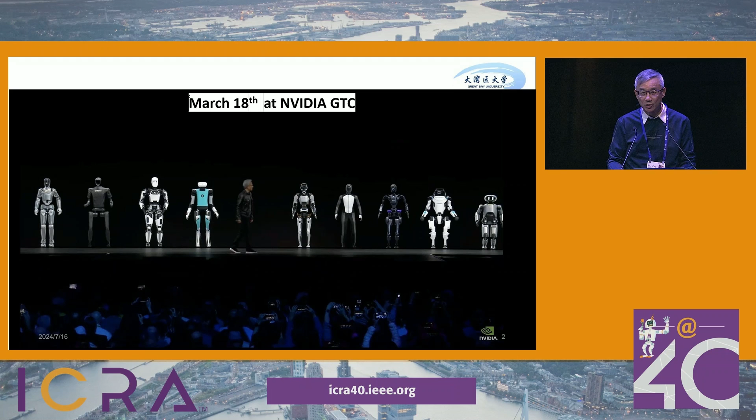Over the year, especially in 2024, we have seen the frenzy wave of humanoids. In mid-March, Jensen Huang showed up on the stage with about 10 humanoids. And just last month, August, in Beijing, there was a World Robot Conference, and there were 27 humanoids, and they were around there for 4 days, walking around and showing off.

There is a big venture market in China as well, and in a rough estimate, there are already more than 60 companies in humanoids, either as startups or spin-outs from some of the very large corporations in China. Almost every week, you will hear of another new humanoid company coming out and raising millions of renminbi. And shamelessly, including one of my companies, joining the frenzy as well.

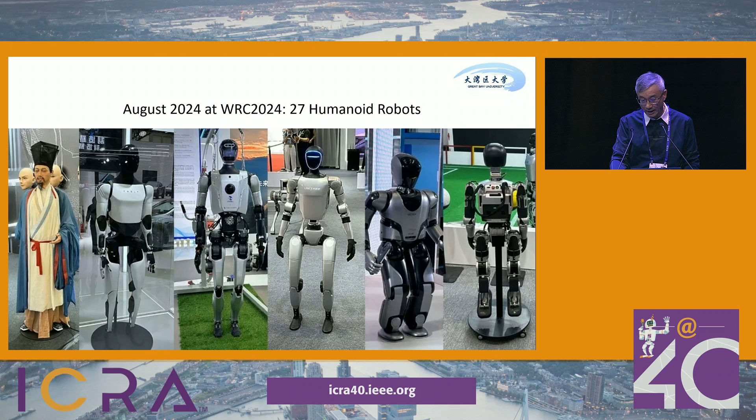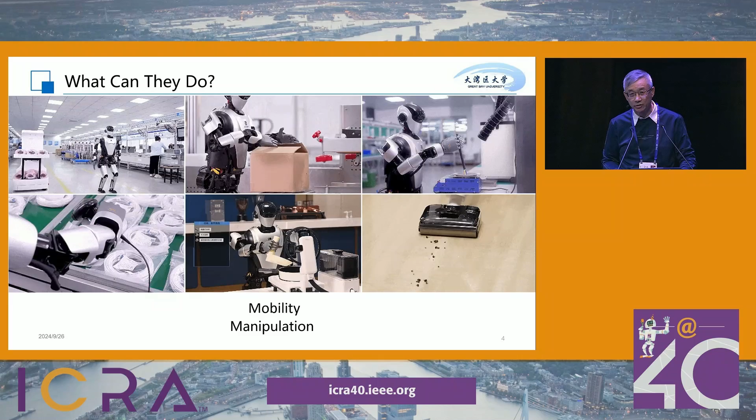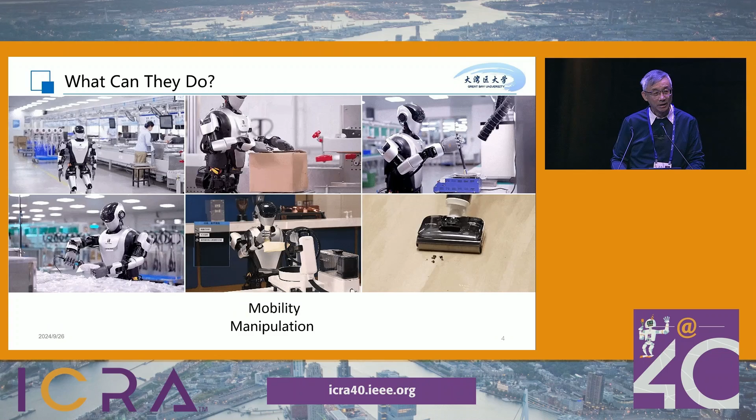But I have to think very seriously about what we are going to do, what we are doing, if there is any hope to make this useful and perhaps economically beneficial. Currently these robots are able to do something, but not a lot. This is from one of those companies. It's not my company. I would not name the company because I'm not sure it's going to be a compliment or not. They are able to walk around a little bit, and they also showed off some very simple skills, picking up some items and putting them into a box. But none of these are in real scenarios or in any real environment.

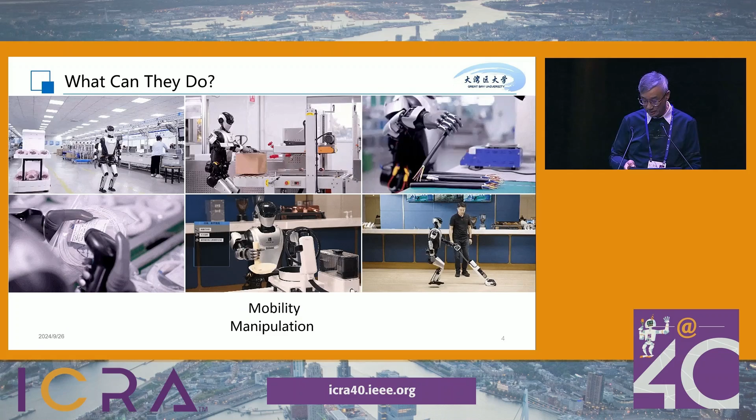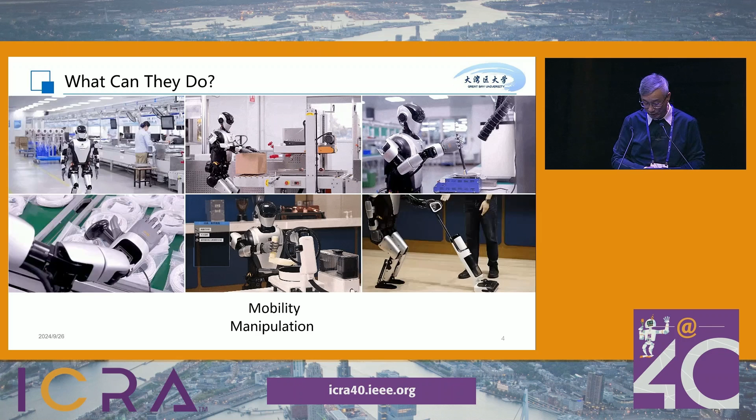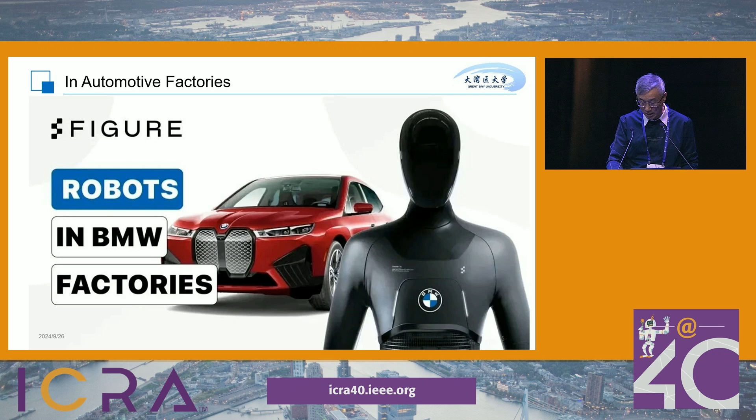By and large, people are talking about 3 major potential markets where humanoids might be deployed, one of which is automotive. I'm sure you have heard of that. And I think Figure has a display here as well during this conference. But what I'm very much interested in is the electronics assembly industry. In China, we call it 3C or ICT, that is information and communication technology products. These products have their uniqueness and their challenges in assembly.

By and large, in the front end, from the computer chips or wafers all the way to printed circuit boards, they are almost fully automated. But at the back end, you will find factories where a group of young workers line up, sitting around tables, and use their hands primarily with some tools to do final assemblies, inserting some periphery components, occasionally doing soldering, fastening screws, and also inspection, and in the end, they pack them up into boxes.

Automation has been implemented in most of these factories, to the extent where it would no longer be cost-effective to push them with total fixed automation. That's because the products have a number of unique features. By and large, they have a lot of varieties, and most of them come in small batches. The factories are not very huge. They're small and medium companies, and they don't need a lot of heavy equipment. In the end, they have to deliver these assemblies in a very cost-effective and time-efficient manner.

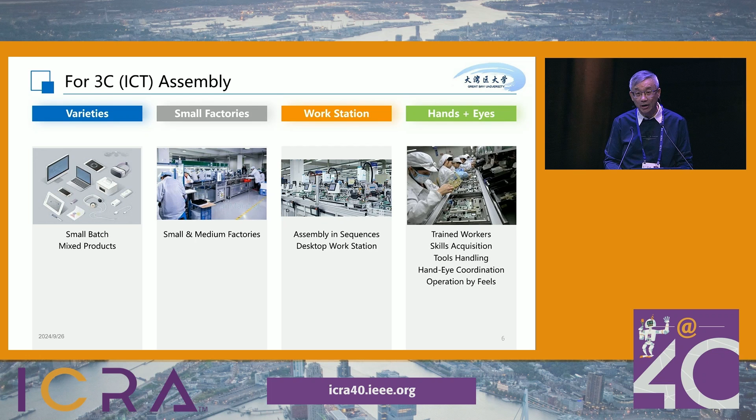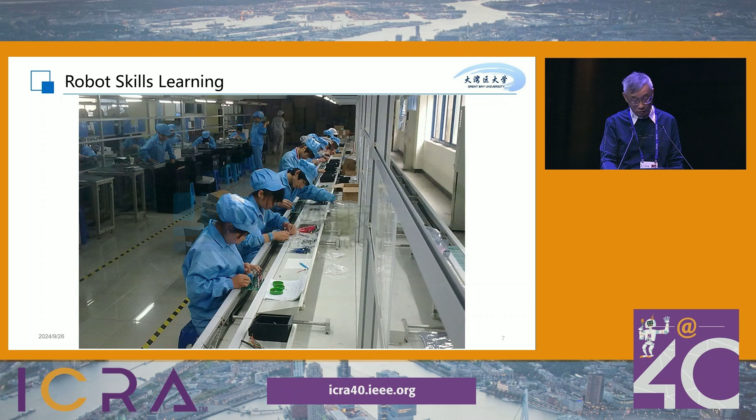So young workers, especially young ladies with sharp eyes and very delicate hands, tend to be employed in these places, where they've been trained maybe for 3 or 4 days for each task, largely using their skills of dexterous manipulation and hand-eye coordination. If you look very carefully at some of these processes, you would think that humanoids might find their place working in places like this, 24 hours a day. They might be more flexible, agile, and cost-effective.

So how do we learn manipulation skills from the workers? And if we do not learn from the workers, are there any other technologies, especially using AI and machine learning, to help us get these dexterous manipulations learned for robots?

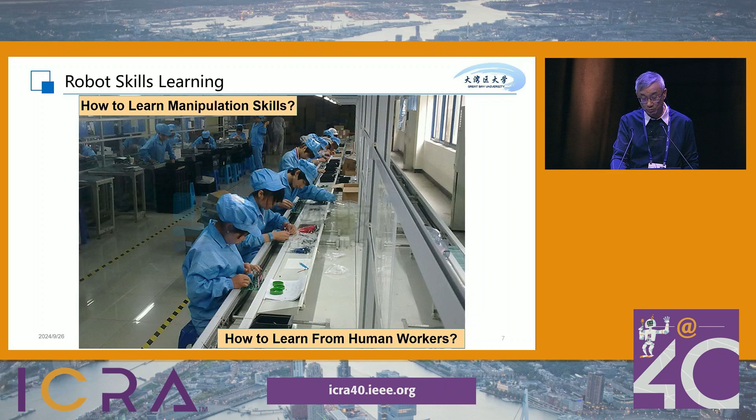And most of these robots need not be humanoids. And you see that the workstations are the primary workplace for the workers or the robots, and mobility is largely not required. But mostly we need two arms and two dexterous hands to be able to do all of this.

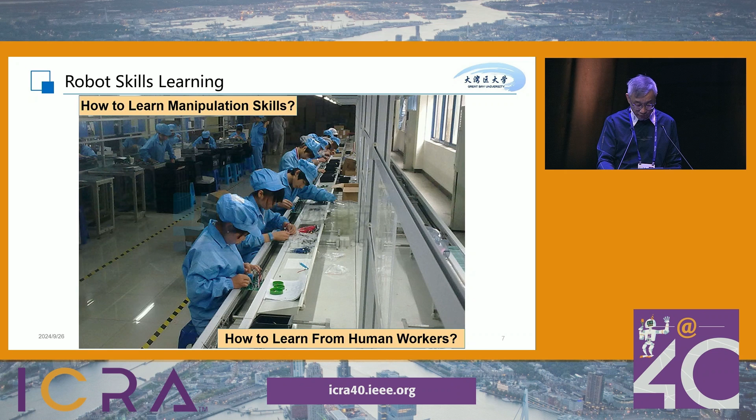For me, as a student under Matt Mason some years ago, I was very fascinated by dexterous manipulation, but really haven't gotten a chance to do much. Now today, we understand from neuroscience, from physiology, what we are capable of doing with our hands, especially when we do the fine touch of assembly by feel, by hand-eye coordination. But we have not been able to get the robots to mimic or to acquire the skills, especially the skills that very delicate young workers are able to do.

So what are the technology components that are missing? One of which is what we are now focusing on, that is trying to figure out how to learn from humans. We know that reinforcement learning is a very powerful tool. Imitation learning has some achievements, but for human dexterous operations in the factory, you are not able to really observe the last fine process of getting things done. That is imparting forces and energy to get the components in the right place with efficiency.

Most of the workers do this very quickly, and it's not strenuous, but in the end, it's very tedious. So they will not like to work for 8 or 10 hours a day. But what would be the tools for us to get robots to learn this? Of course, we are trying sim-to-real, imitation learning, and learning from demonstrations, all these techniques in the laboratories. But to me, we really lack knowledge of human data, especially the touch and feel and tactile sensations that we use quite extensively in our skills.

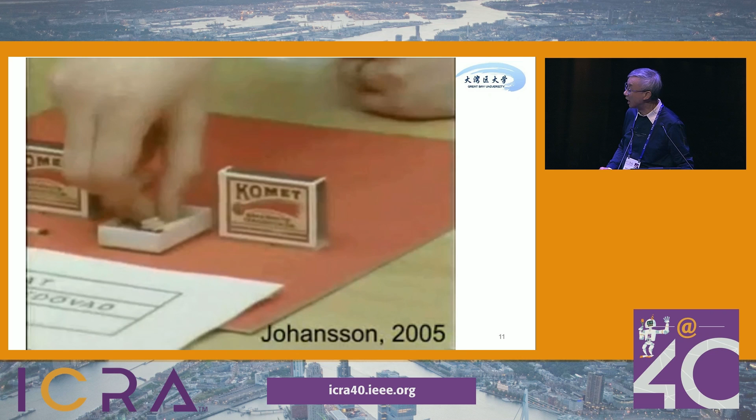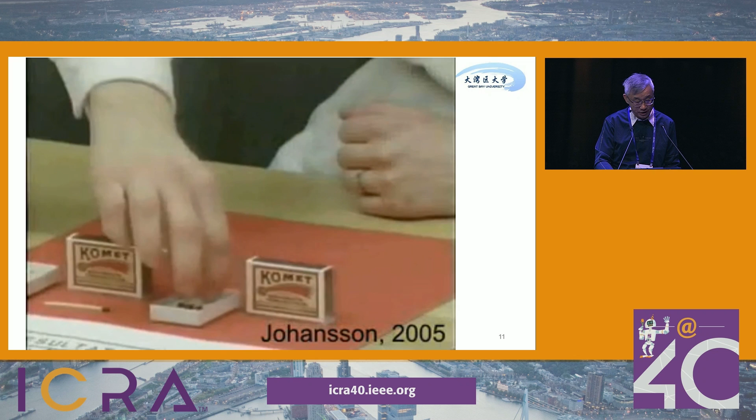And there are databases, or platforms for collecting data, for training robots to do dexterous manipulation, but the tasks that they are able to do, or the data available for the tasks, are very much limited. Grasping is one big category, insertion is another, but fine dexterous manipulation is not much there. So I will just say that one of the technologies that is lacking is tactile sensing. Although we know there is a lot of research on soft skin and tactile sensing, for any dexterous manipulation without tactile capability, you will find it very difficult. This would be the case for a young girl who lost the skin sensation for touch.

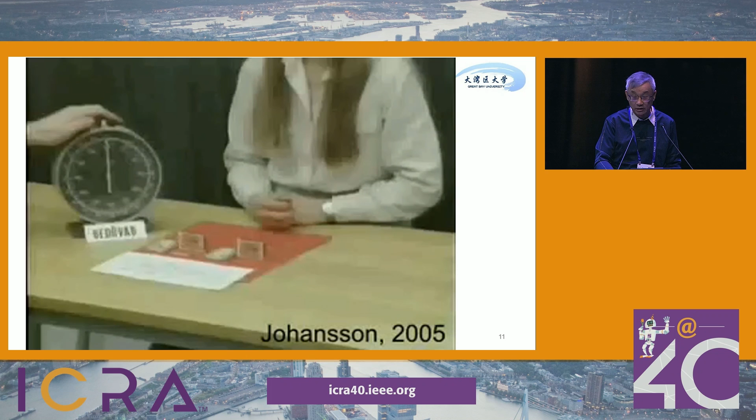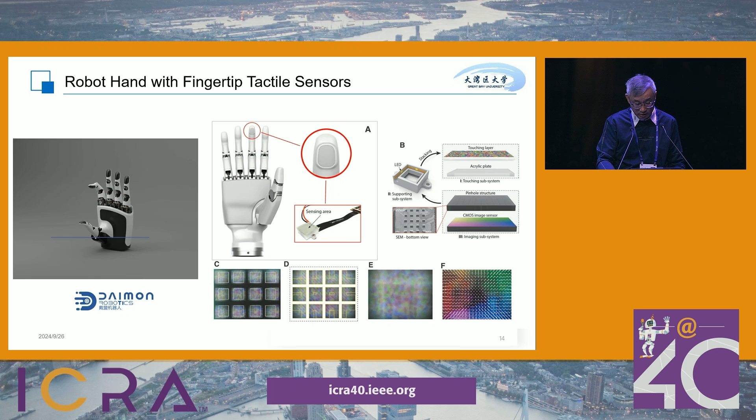So there are sensors that would help us, and we have built a particular type of sensor based on optical measurement that gives us more detailed information about pressure distribution. Especially, we are able to categorize the modalities of tactile sensing and make use of that for robotic manipulation. We're able to integrate them within the fingers of a robot hand, and we have done some work to make use of them for robot learning. But in comparison with the tactile sensing capabilities of human skin, we are very much short.

We already know that there are 4 types of receptors, and they are distributed over multiple places in our hands, and our sensors are far, far away from these capabilities. And there are a lot of questions. Do we need 4 kinds of receptors? Do we need all this information? And if we do, how do we achieve them? Especially, how would we be able to acquire the signals from a human hand, 4 types of receptor signals, and use them to teach our robots?

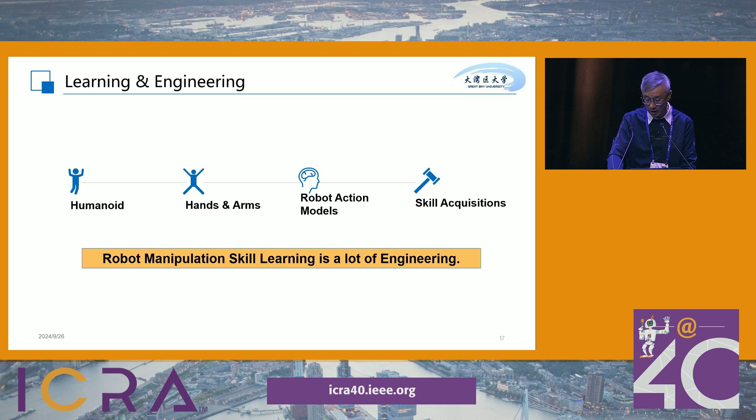And furthermore, in the last 10 years or so, we have learned that fingertip skins have memory of the history of deformation. And the history of deformation is used in the current process of manipulation control. And also fingers have computing power as well. So there's still a long way to go to make use of AI. And what I'm trying to say is that robot manipulation skill learning is a big, big task, and there's still a lot of room for engineering, not only for the people doing algorithms. Thank you very much.

Thank you, Michael. Yeah, I'm joining our